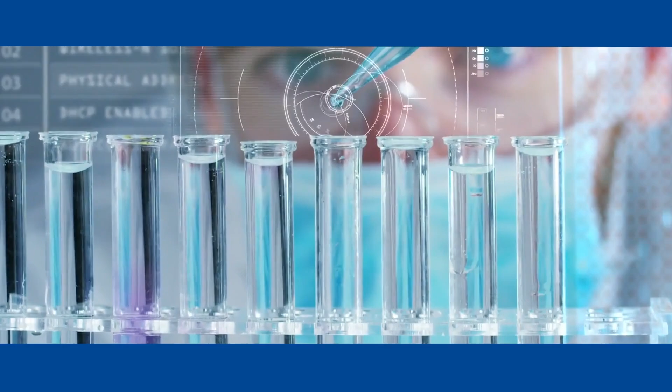In our universe, all things are driven by energy. Energy powers our sun, our environment, our society, even our bodies. Energy is life. New and profound advances in science and engineering are allowing us to harness this energy abundance in marvelous new ways.

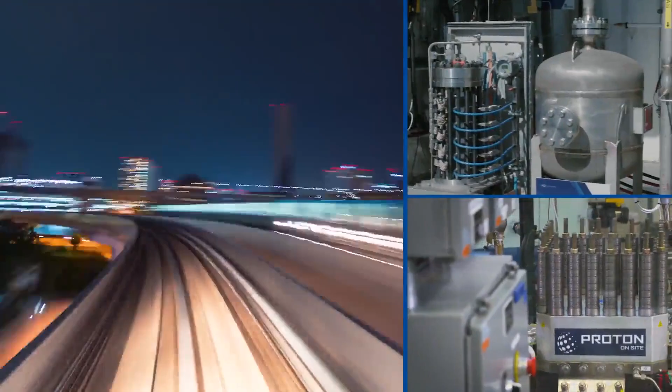To create clean, affordable, and reliable energy for all Californians, the SoCalGas Research, Development, and Demonstration Program has enlisted an incredible team of experts in science, engineering, industrial technology, and environmental policy to identify, build, and implement these transformational technologies throughout society.

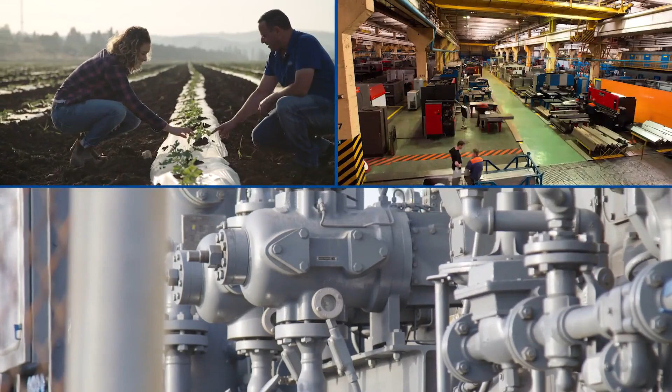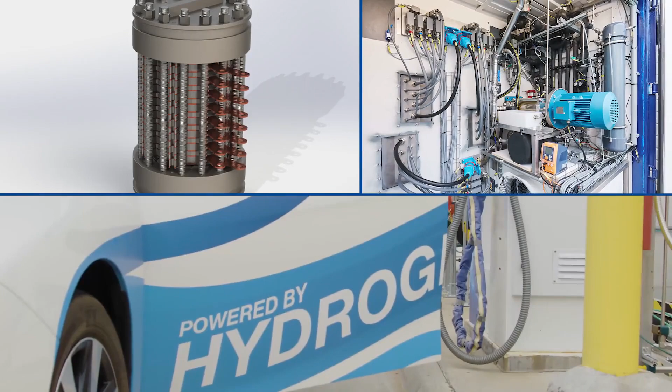Doosan Mobility Innovations hydrogen drones that have 4 times the flight capacity of lithium-ion powered alternatives. And hydrogen-powered yard trucks that can move massive shipping loads for 20 hours per day with 0 emissions.

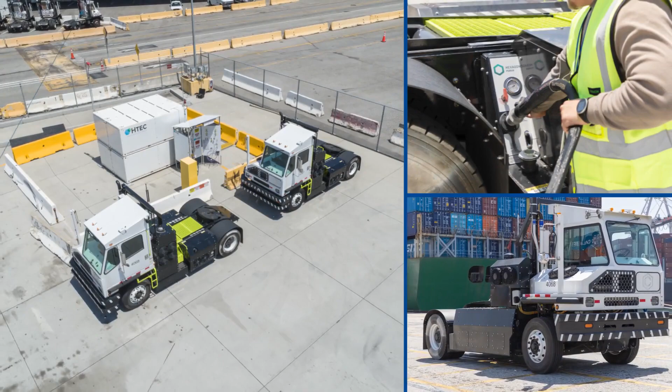These revolutionary projects are saving energy, reducing emissions, and improving air quality, as well as increasing energy safety, reliability, and affordability for all.

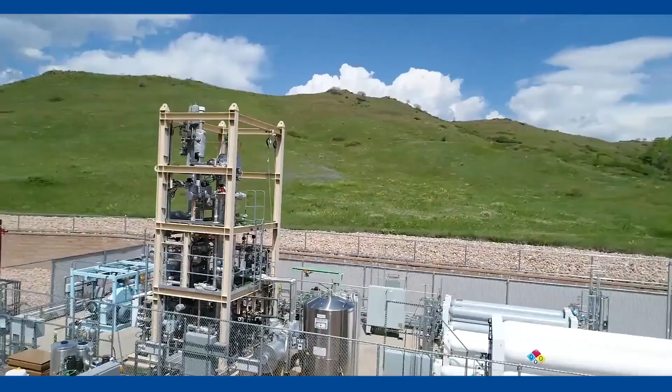At SoCalGas RD&D, we believe in clean energy abundance, so we are sharing this pivotal research in order to deploy these innovative technologies across the world, because energy is life.

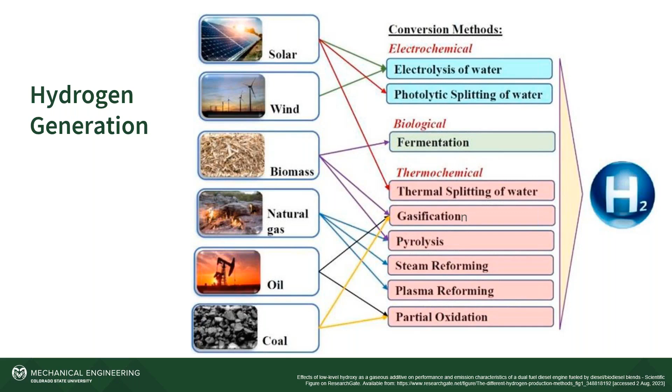So hydrogen generation - probably the most popular way to think of this is generating hydrogen from solar and wind, and that is certainly possible in an area that is being researched extensively. Most hydrogen currently is created from steam reforming of natural gas, but there's a wide array of approaches to creating hydrogen.

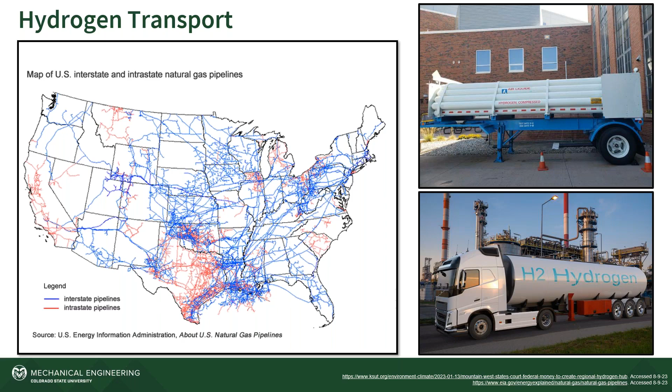Hydrogen storage is another important topic. If we generate it somehow, we most likely need to store it and utilize it at another location in another application. Compressed gas is the most prevalent currently. Liquid hydrogen is another important approach, and then there are a number of material-based approaches that are currently being researched.

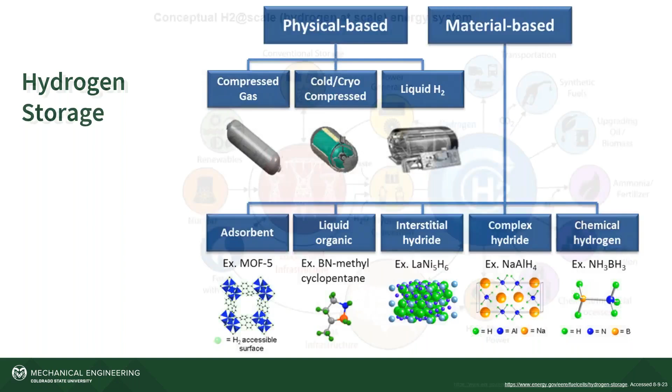Hydrogen usage - this diagram is conceptual. The current usage of hydrogen is primarily the purple circles at the lower right. The other uses are primarily being researched currently.

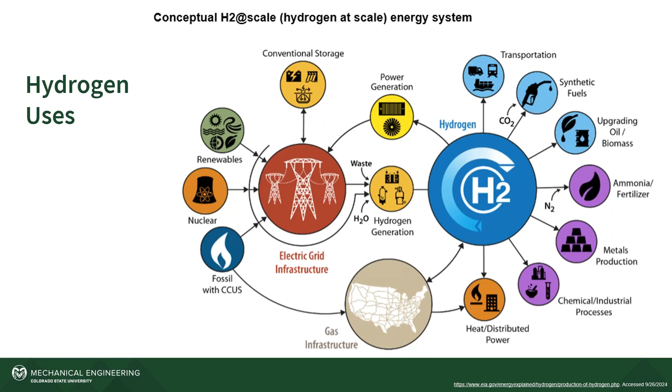Back to the natural gas pipeline network - this slide shows more detail on the natural gas pipeline system, with some bullet points on metrics and statistics for the U.S. natural gas system. There's about 6,000 integral compressor engines on the pipeline system, primarily in interstate pipelines, and around 14,000 smaller gas compression engines. Those engines are used anywhere between the well and the point of use for the natural gas.

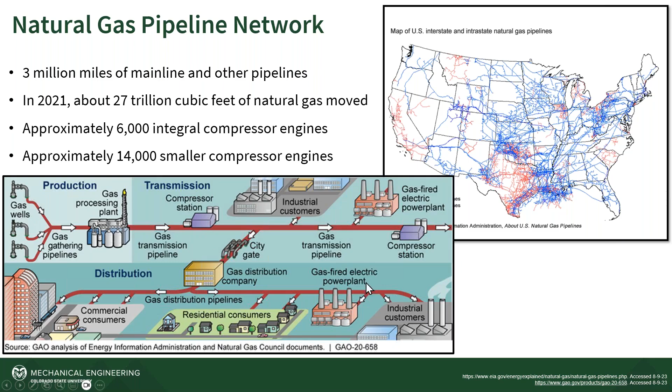Here are some examples of gas compression engines. The engine at the upper right is a two-stroke integral compressor engine where the compressor pistons run off the main crankshaft. All of these engines run on natural gas and compress natural gas. The lower right shows an Ajax compressor system, and the lower left shows a gas compression package.

The packages at the bottom of the screen would be gathering engines or wellhead engines, so they're closer to the well, as opposed to the upper right picture, which would be on the interstate transmission lines. The engine powering the gas compressor on the lower left would most likely be a 4-stroke rich burn engine or a 4-stroke lean burn engine.

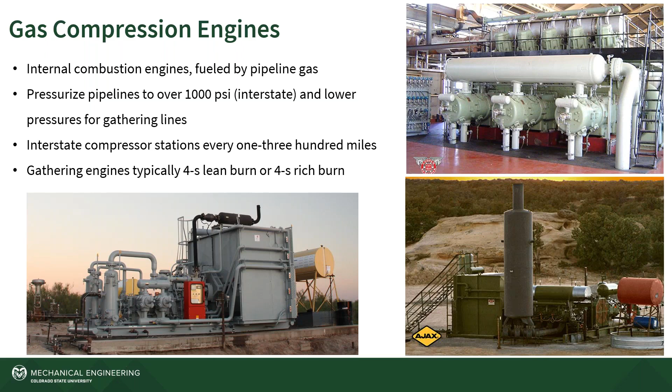When I get into the results of the research, I'm going to be talking a lot about lambda, so I'll provide a little background here. The chemical equation shows the ideal combustion of a hydrocarbon fuel, where you have just the right amount of oxygen and fuel so there's no oxygen or fuel left over in the products. That's referred to as stoichiometric combustion, ideal stoichiometric combustion.

The air-fuel ratio based on mass is a way to characterize a fuel, and lambda is the ratio of the actual air-fuel ratio to the stoichiometric air-fuel ratio. This is a normalized parameter, so the composition of the fuel can change, and it's still a good metric to focus on with regard to engine performance and catalyst performance.

When lambda is lean, that means there is excess air, and it's greater than 1. When lambda is less than 1, that means the mixture is rich. Other parameters used are air-fuel ratio directly and also equivalence ratio, and those are described on the slide.

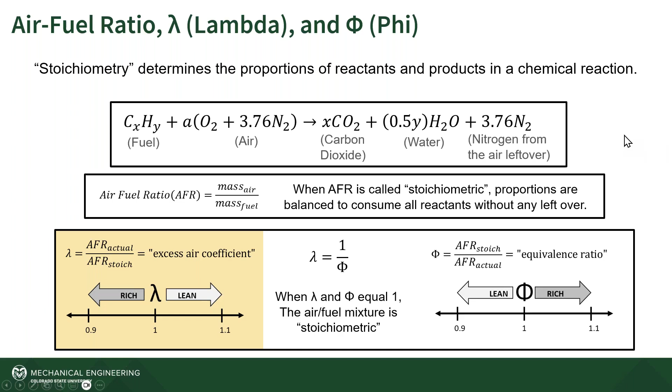Natural gas engine emissions are obviously very important and the focus of engine design and engine retrofits. There are basically 3 categories. Nitrogen oxides are composed of NO and NO2, and those are regulated; they're associated with the high temperatures in the combustion chamber. Carbon monoxide and hydrocarbons are also regulated, and those are associated with incomplete combustion in general, specifically VOCs, volatile organic compounds, which are typically regulated for hydrocarbons.

And then on the right are greenhouse gas emissions, and from natural gas engines we're primarily worried about carbon dioxide and methane.

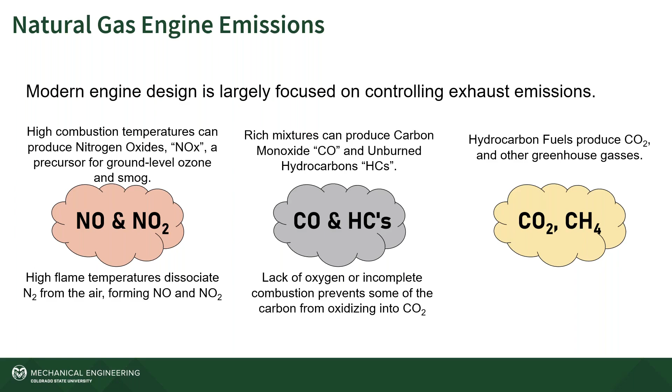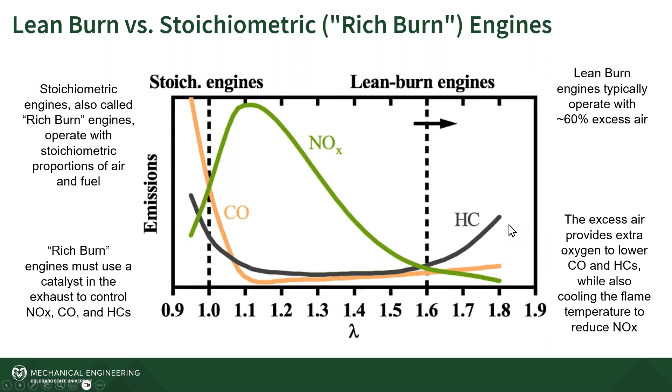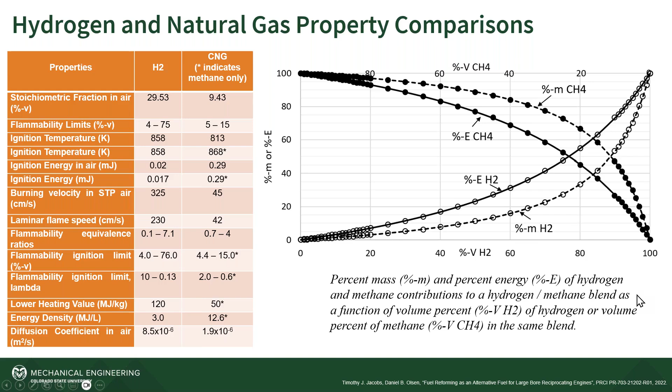Other properties of these fuels are shown on the left. So that is the background information. The next section is on four-stroke rich burn engines, and then the final section will be on our hydrogen blending results. The engine we use for this research is a Caterpillar CG137-8, 18-liter V8.

400 horsepower, 1800 RPM. This engine is used for gas compression, power generation, and water pumping. It has relatively low power density, about 11 bar BMEP, and a relatively low compression ratio, about 10.25. It's designed to run on a variety of different fuels, including unprocessed wellhead gas.

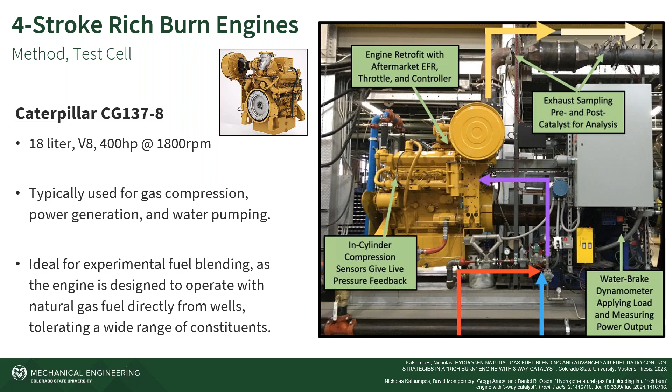The three-way catalyst is a very important part of this system; it's the main emission control device. The engine operates roughly at stoichiometric conditions, so it produces relatively large amounts of NOx, CO, and hydrocarbons. However, those are at just the correct ratio to be reduced across the catalyst. They essentially react with each other and oxygen to form nitrogen and CO2, which reduces emissions to very low levels.

The catalyst that we used was sized for the California Best Available Control Technology requirements, shown at the lower right.

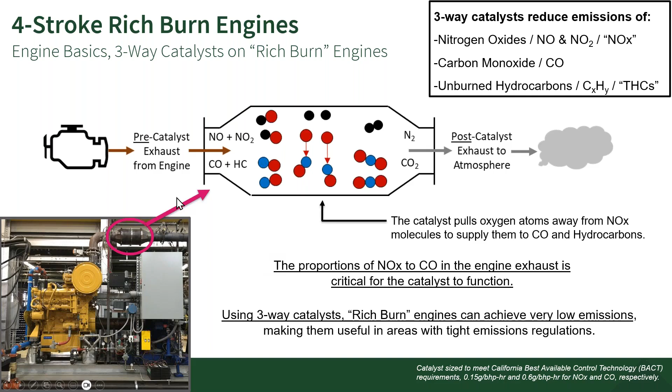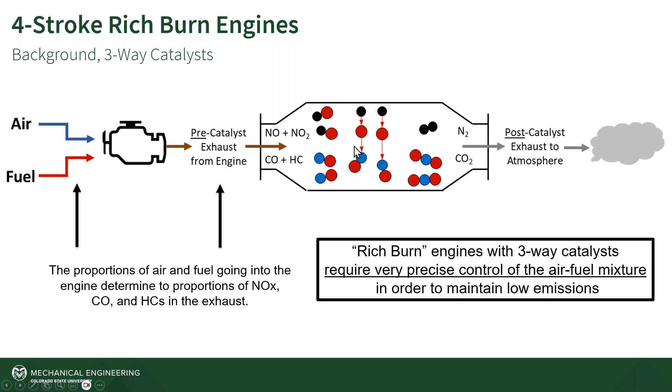The requirement for the catalyst to function properly is stoichiometric operation. The lambda value actually needs to be controlled very precisely, and we'll see that as we move forward. That is controlled with the amount of fuel and air feeding the engine, so we get just the right composition of exhaust products based on the air and fuel mixture to get significant reduction of emissions across the three-way catalyst.

Just some more information here about the test setup. We have sampling probes pre- and post-catalyst, shown at the lower right-hand corner. We use a Fourier transform infrared spectrometer and a 5-gas analyzer bench to measure emissions.

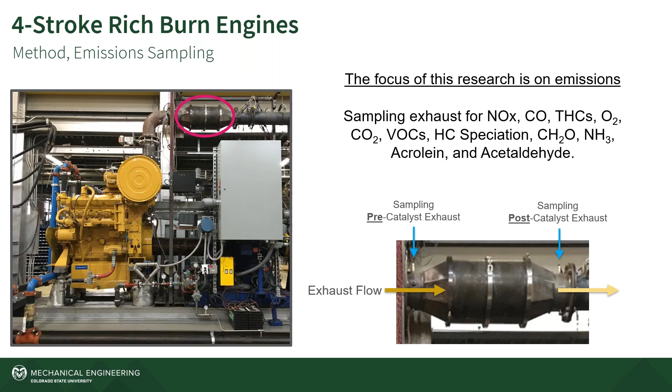So the area of operation with respect to lambda, this region here for stoichiometric or rich burn engines is blown up here. So this is baseline data that was collected, and you see lambda is varied from rich to lean. On the rich side, the post-catalyst carbon monoxide is high, but then comes down in this region to very low levels. NOx is high on the lean side, then comes down to very low levels in the middle. So this is the area of operation right here.

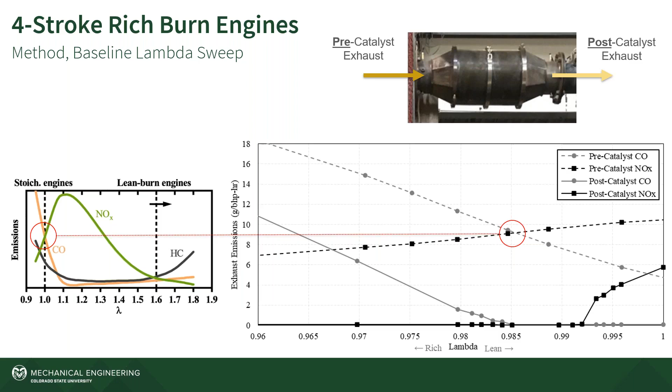And you can see by the lambda values that we need to control the system to a very precise lambda. So a little bit more on that. Based on that plot, we can identify a window of operation.

So the NOx comes up on the right, and when it crosses the emission limit, we mark that as the limit of the window on the lean side. The CO comes up on the rich side, and the limit is 0.6 grams per horsepower hour, and that marks the limit of the window on the rich side. We chose our operating point to be right in the middle, and that's what's programmed into the controller, to reduce emissions.

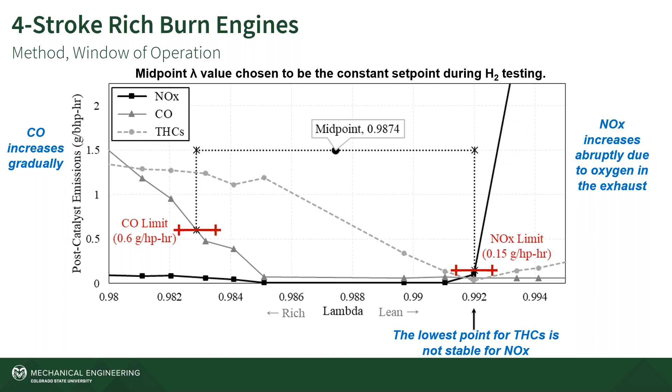On this plot, we see the addition of hydrocarbons, shown as the gray dashed line, and there's really no perfect area of operation. The hydrocarbons are minimized here, but that's really close to this nonlinear portion of the NOx curve. So deciding where to operate involves trade-offs.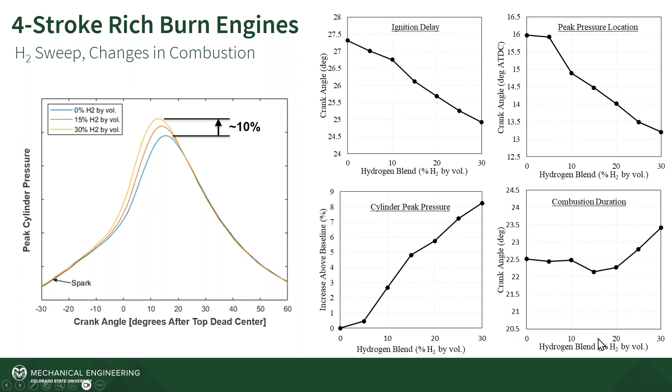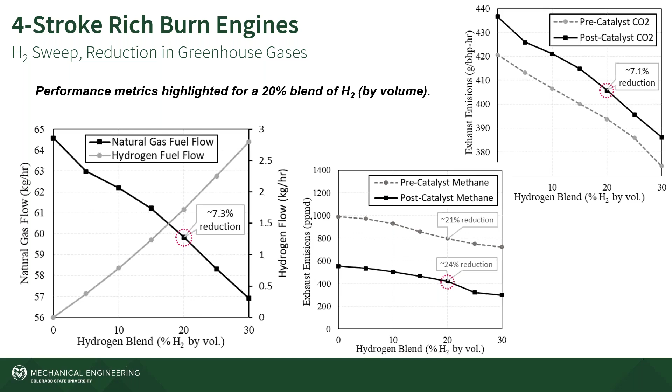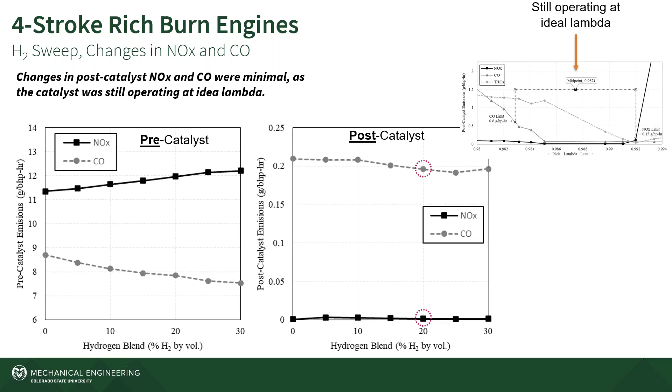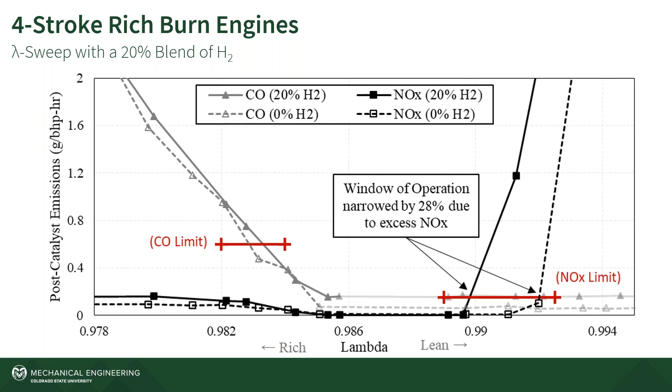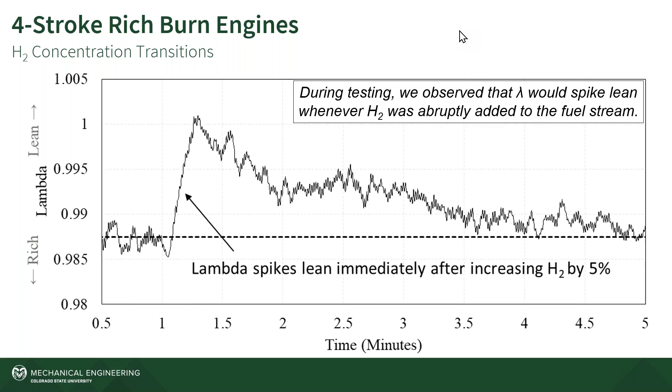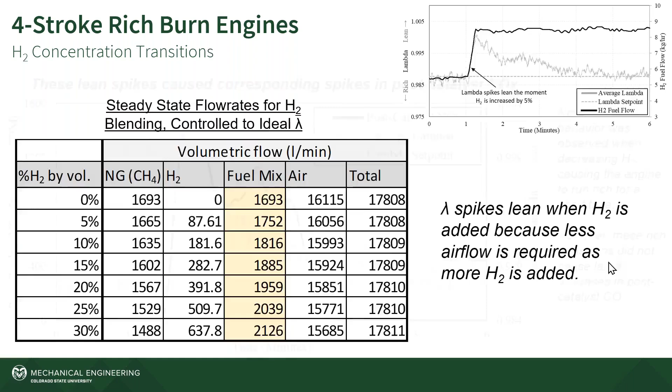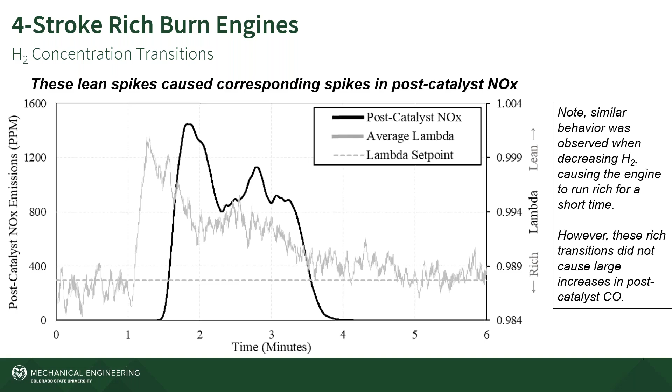Another thing that we discovered was that as hydrogen is increased, it's nonlinear in terms of the amount of airflow required. And so when we transition by 5% hydrogen, if we're starting at a higher value, 25, we actually see a larger NOx spike.

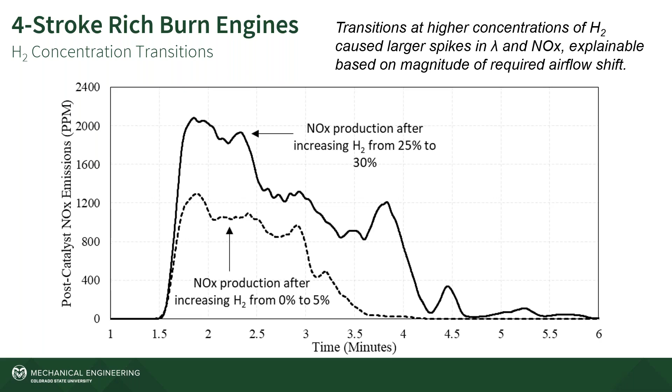Now the controller takes over, and after a few minutes, it's back down to steady state conditions and all the emissions are controlled. The concern comes in if we're having these sorts of spikes: what is the 1 hour average of NOx? What is the 1 hour average of CO? And so on.

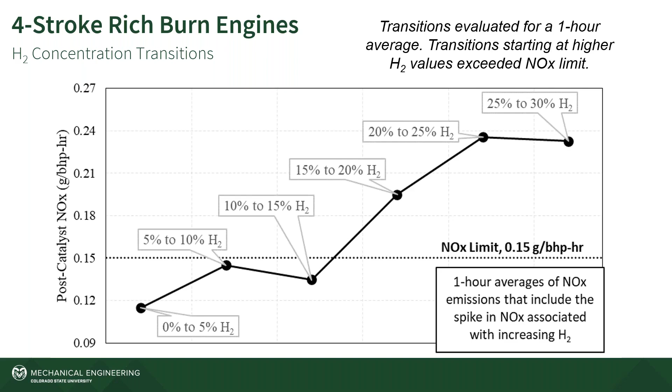The CO emissions were basically unaffected because the behavior is more gradual on the rich side. But for NOx, for some of these transitions, given the way the engine was set up with regard to its controls, we see that a 1 hour average in the time frame of that hydrogen transition is above the limit. But of course, after some period of time, the emissions go down to below the limit.

So, the final phase of the work, we looked at the controls. As I mentioned, we received some in-kind support from Woodward, and this engine was actually configured with a Woodward large engine control module, or LECM controls, so that we could do more investigation and research on the controls area.

And the LECM basically controls two things. It controls the speed, that's with the throttle valve, so you have a speed sensor feedback, and the speed is controlled with the throttle valve. And then it controls lambda, and that's controlled with the electronic fuel valve. The lambda sensors provide feedback for that, which are located in the exhaust.

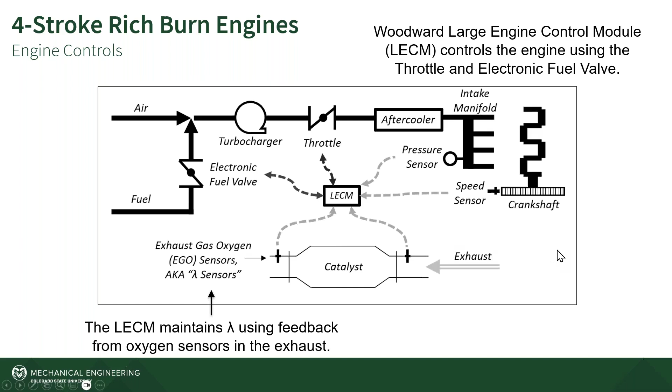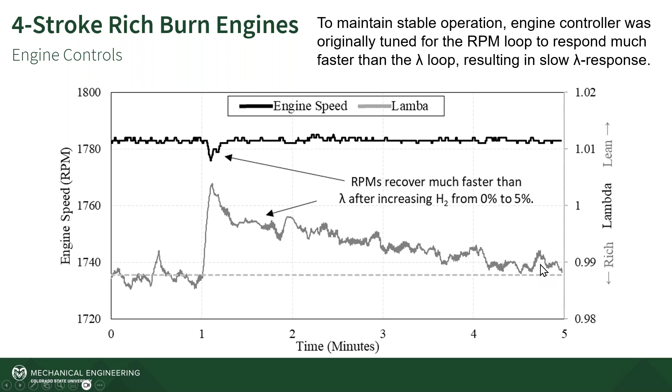So we did some investigation into improving the control. In the controller, we can adjust the PID parameters, the proportional, integral, and derivative control parameters. I'm just going to show some adjustments to the proportional control parameter.

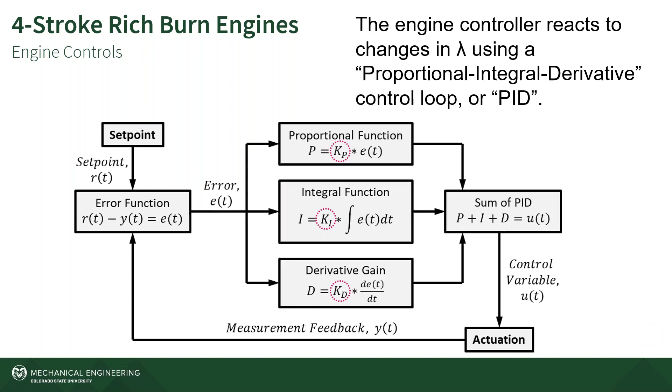So, this is a complex problem, and we just really scratched the surface as far as our investigation of the controls. But the main thing that we're trying to convey here is that when it comes to hydrogen addition, these transitions, the engine controls can have a significant impact one way or the other.

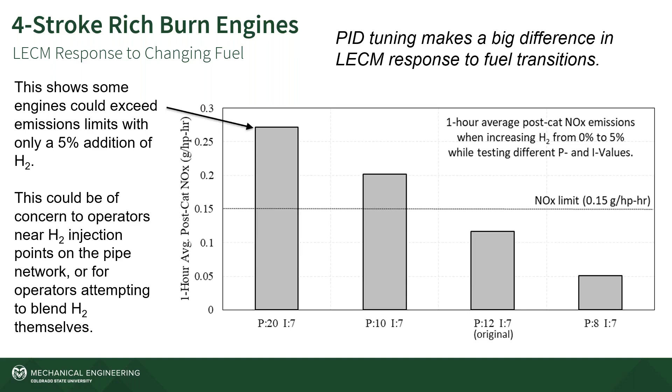Okay, so that brings me to my conclusion slide.

With regard to hydrogen blending, we went up to 30%. We feel we could have gone higher—that was our target, to go up to 30%. We didn't see any issues with engine operation, no malfunctions of any kind. This test was set up so that the engine controller basically had no knowledge that the hydrogen spike was coming, so this is really looking at the engine in its stock form and evaluating what the hydrogen blending will do if no action is taken with regard to controls.

The post-catalyst NOx and CO did not change significantly as long as the ideal lambda was maintained. The lambda window of operation was narrowed by about 28% with a 20% blend of hydrogen. So that was a negative impact of the hydrogen blending, but it is something that we feel is manageable.

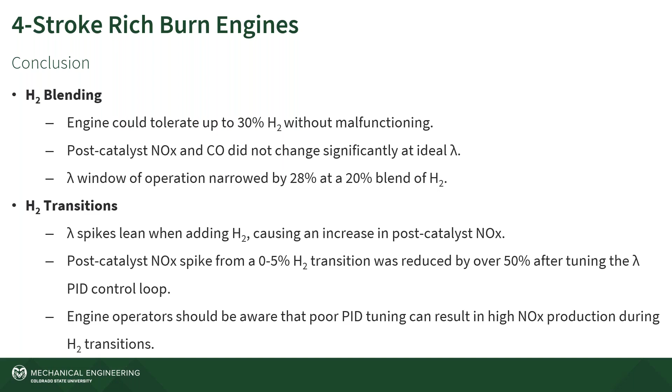The other thing I would say in conclusion here is most of this work is captured in the thesis and a publication led by Nick Katsampis. He was a master's student, and that reference is given in one of the slides above. So if you're interested in learning more, you can get those publications. And that's my last slide. Thank you.